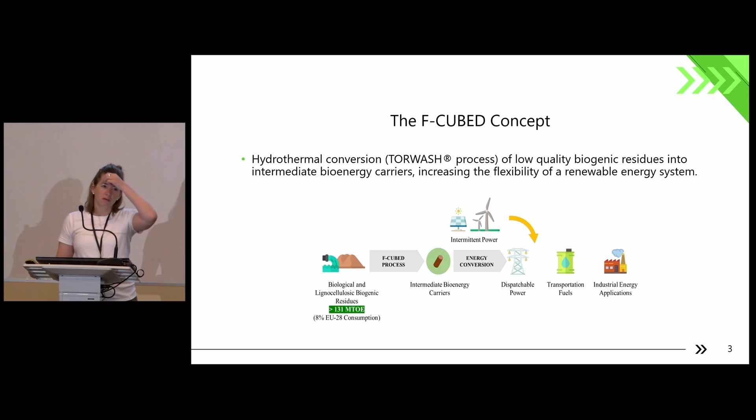So F-CUBED, as Mike was saying, really is structured around hydrothermally converting these low-quality, wet, biogenic residue streams into intermediate bioenergy carriers, so pellets, but also biogas. And the goal here really is, so we're in the middle of this energy and materials transition, and we need to transition away from fossil fuels to more renewable sources of carbon and energy.

So in this energy transition and in the future, a lot of our electricity will be supplied by solar and wind. In the Netherlands alone, it's projected that 70% of our electricity will be supplied by wind. Well, it's a very windy country, but that's great. But of course, biomass is going to also have an important role in this transition. And that can be, for example, for hard to electrify sectors, or for maybe some local value chains or use cases, or for heat.

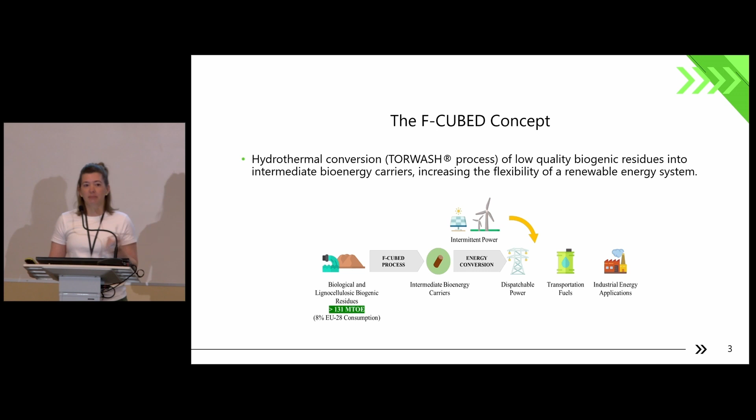So it's also really important to look at sustainable biomass, and one of the biggest sources of sustainable biomass is waste streams. So how can we use these waste streams? And we like a challenge, so we go for the really wet, difficult, hard to process, nasty, stinky types of residue streams. And the idea there with these bioenergy carriers is it can help balance these fluctuations in the future power grid that will be dominated by wind and solar. So that's the idea behind it.

So as I said, we're focusing on these wet biogenic streams. There's a lot of waste streams. And the idea behind F-CUBED is to really focus on streams that have a high potential for energy generation. And so that means biological sludges, so wastewater sludges or other types of sludges, including paper sludge, which is also from a wastewater treatment plant, and also lignocellulosic residues. So that's where some of our residue streams come from as well.

But in total, these have a huge, huge potential for energy generation, even though they're very wet and difficult. If we can upgrade them, we can get a lot of energy and maybe some other nice things from them as well.

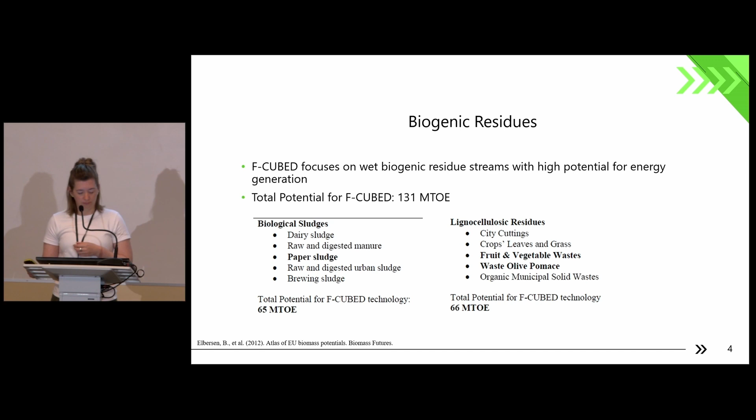So the main objective of F-CUBED is we really want to validate the conversion of these wet residues through our process into intermediate bioenergy carriers, and that's at TRL, Technology Readiness Level 5. And that also means that we demonstrate our process at pilot scale in a relevant industrial setting.

So there's different objectives that are technological, sustainability oriented, and also economic. And this isn't all of them, there are more. But the main ones, and ones that you'll hear about today as well.

So first, going from lab scale to pilot scale, if you've ever done any pilot testing, it's quite different and it's quite challenging, but it's really necessary if we ever want to scale up, commercialize, industrialize these types of processes. So we really wanted to prove at pilot scale our process, and not just for a day or two, but really long duration testing. So several weeks, continuous pilot scale operation of our process on site in the relevant environment. So that means at the industry where the residue streams are generated.

We have 3 residues, as Mike alluded to, and you'll hear a lot about today. So one is paper sludge, the second is olive pomace, and the third is fruit and vegetable waste, which is orange peels in our project. We upgrade the solids into these intermediate energy carriers, and we look at the quality of those pellets that we produce compared to, say, a premium woody pellet, for example. We also look at recovery of value-added products, namely nutrients.

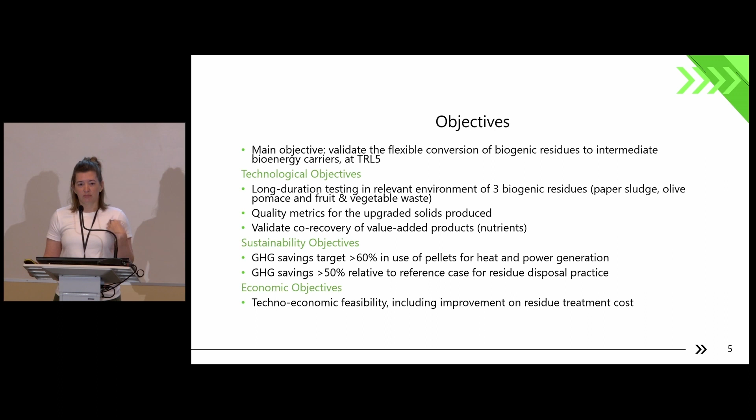So this is the consortium. There's 14 partners. And you'll hear from many of them today, and I'm not going to go into all the details, but we have a really nice group of partners from all across Europe, and that includes, of course, the industrial partners where we did the tests, and also partners for the whole process from the residue stream all the way to the production of heat and power, fertilizer, biogas, and the pellets as the products.

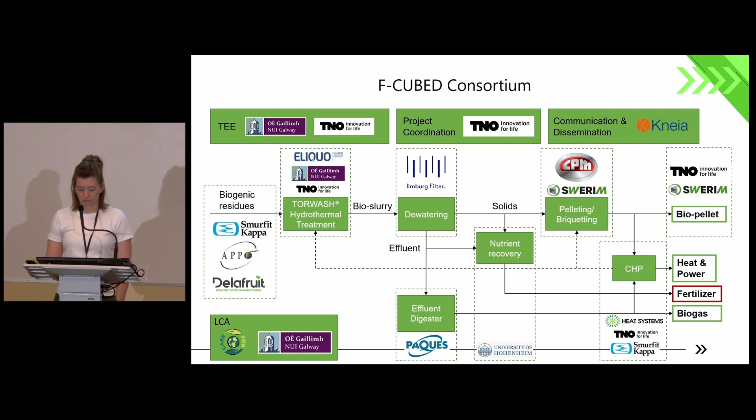There were 8 work packages in the project, and I'll just go through them briefly, but the bulk of the work, again, was this on-site testing. So work package 1, this is where we characterize the feedstocks, and also we want to optimize and de-risk TORWASH. So this is really important when you're going to pilot scale. So again, we have our 3 feedstocks here on the left. This is the overall process. We do TORWASH, first at lab scale, then at pilot scale, and we de-risk it at pilot as well before we take it to industry.

Then also at pilot scale, we have mechanical dewatering with the partner Limburg filter. So that separates the solids from the liquids. The solid cakes are then pelletized, and that goes to combustion testing and quality testing. And the liquid fraction is digested to produce biogas. And we also look at nutrient recovery as well from the liquids and the solids. So this is the overall process, and you'll hear more about this as the day goes on today.

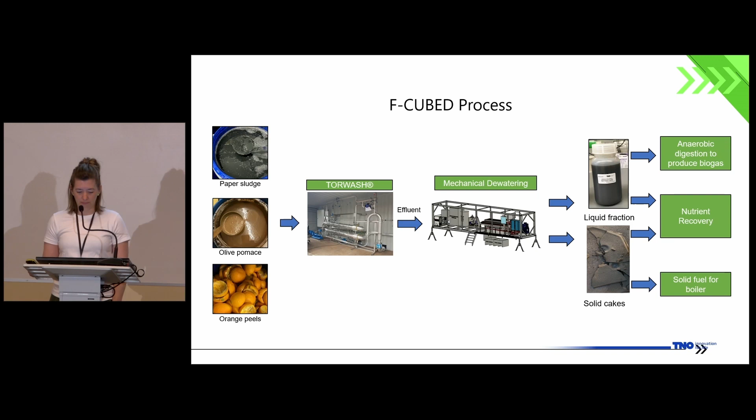So in the first part of the project, we really wanted to optimize our process. So first you do screening tests in the lab, and you'll hear more about this, and then larger tests, and then some tests at pilot scale. And this is really important because, as I said, piloting is really difficult. There's always different challenges from doing it in a small batch scale in a lab to continuous. And that's also one of the really important things about this project. Not many people do pilot testing because it's hard, but it's really necessary to make that leap to industrial scale. We can optimize a lot of different things, but our target was really dewaterability of our residue streams. So really being able to separate well the solids and the liquids.

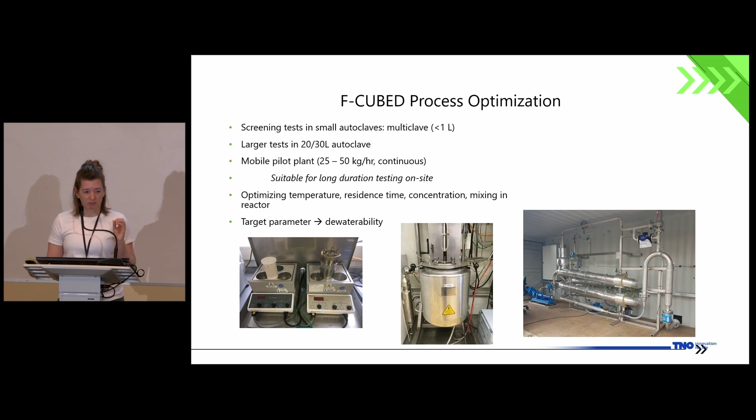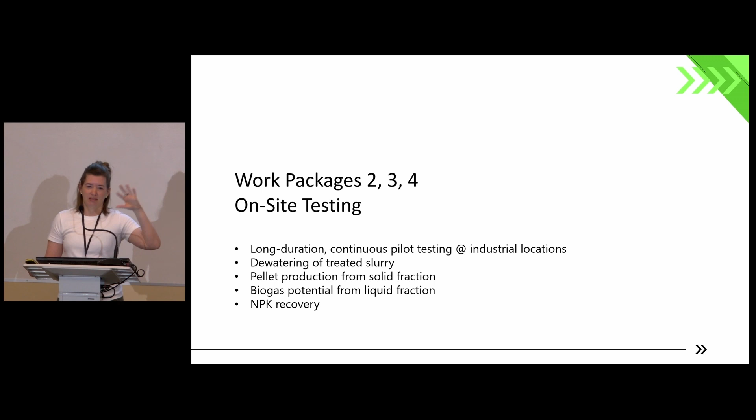The next 3 work packages were really about this on-site testing. So we take our pilot equipment, they're all in shipping containers, on a truck, and we go to the industrial sites and we do the long duration testing. We dewater it on site, and then we bring the solids back and do the pelleting, and then they go to another partner for biogas testing, the liquids and the solids go to another partner for combustion testing.

So we take the pilots all over Europe, which was really fun. So first we were in Sweden to process the paper sludge at Smurfit Kappa, then an olive mill in the south of Italy, and then to Spain for the orange peel processing, and then back to the Netherlands where it sits now. So it's made some kilometers over the last few years.

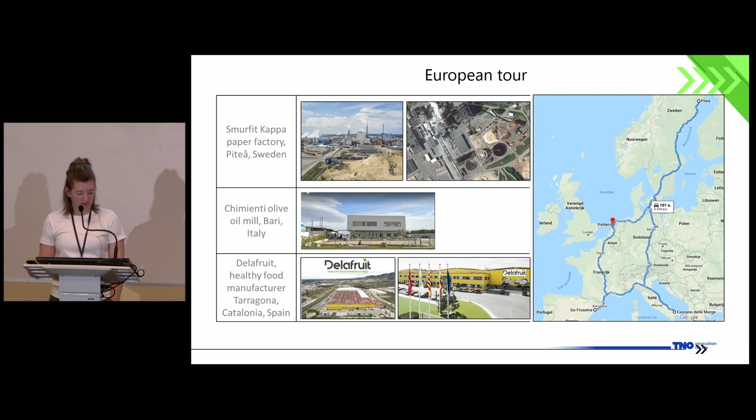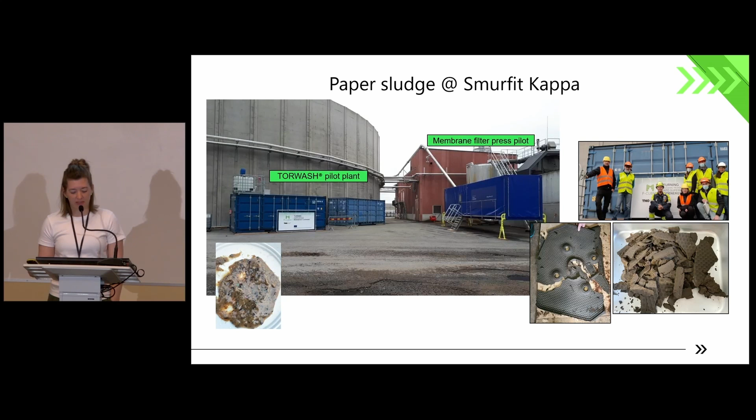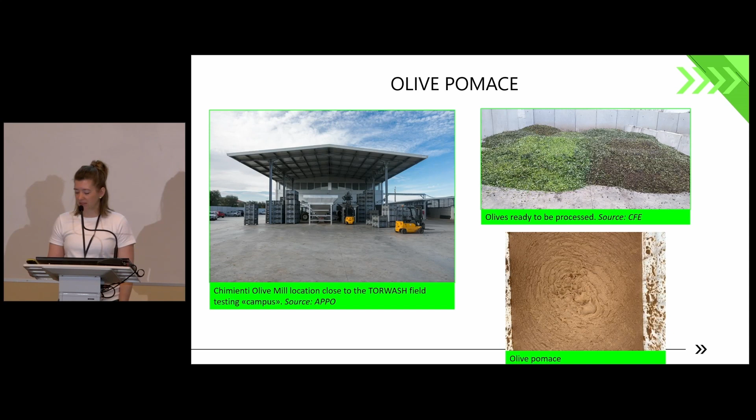This is what it was like in Italy at the olive mill. We had set up behind there, and we got the olive pomace directly after the first pressing of the olives, and we could process it again directly on site. And the orange peels as well. So at Delafruit, they pressed the oranges to extract the juice and the pulp, and then the peels were ground up with some of their equipment and diluted, and then that's the slurry that we processed in our TORWASH reactor.

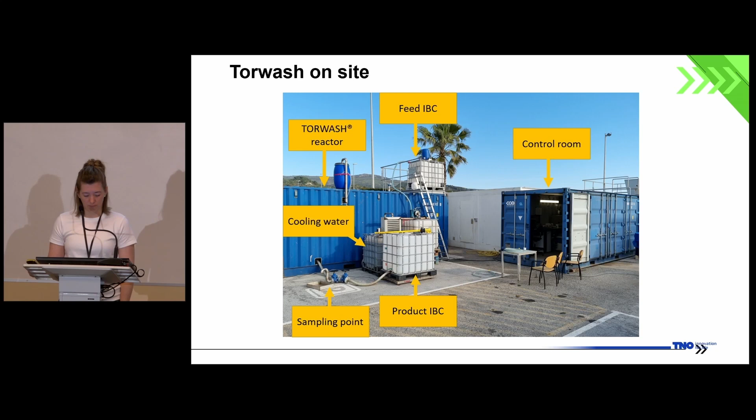So work package 5, so after, of course, we have all this data from the pilot tests and the lab tests, then we do some modeling, we do a value chain assessment type of work. So this is where we look at the technological, economic, sustainability performance of our proposed process and what we discovered in our testing, and compare it to reference cases, again, for all 3 of these residue streams.

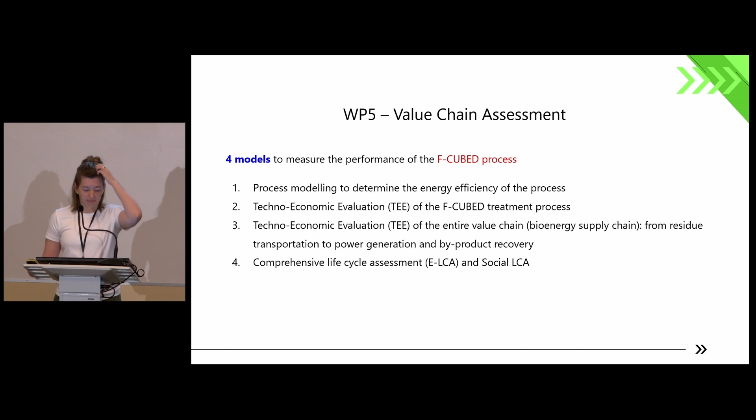And so to do that, and you'll hear about some of these models today, we use 4 different models. So there's process models, also techno-economic evaluations, value chain assessments, and life cycle assessment, environmental life cycle assessment, social life cycle assessment. And you'll hear about these models today as well.

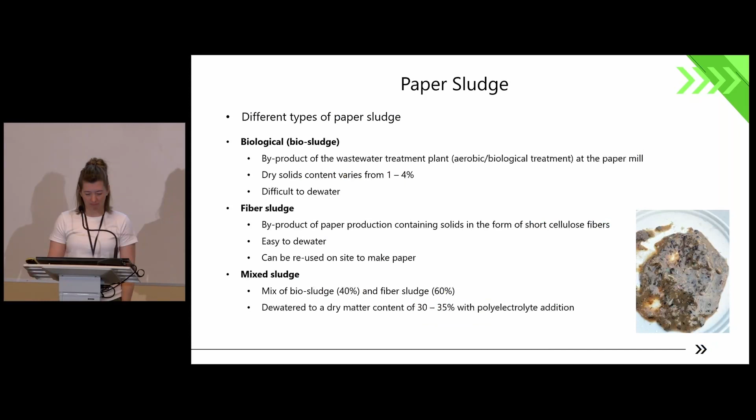Oh, I got ahead of myself. I couldn't go back. All right. Well, you already saw these nice pictures.

So work package 5. And then work package 6 is about dissemination and communication. Well, that's one of the activities that we're doing here today, is sharing our results. But of course, this is really important. We really, like today, want to share what we've done with stakeholders and with the general public and with the scientific community. That's really important.